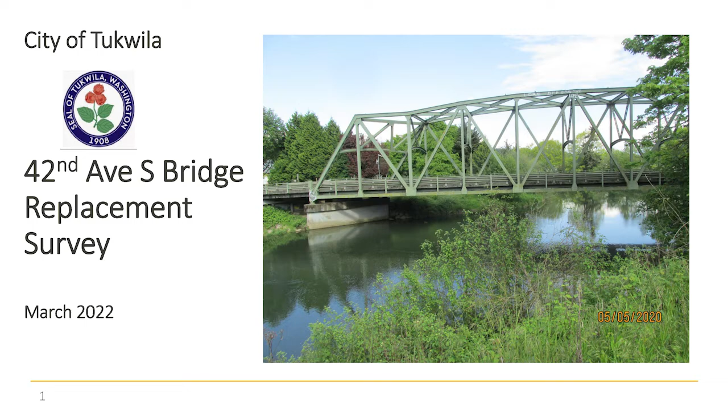As part of the design phase, a type, size, and location report was completed by design consultant Trantech Engineers. The type, size, and location report is an industry standard for bridge replacement and construction. The report identifies 2 types of materials that are being considered for the bridge replacement, which are steel or concrete, as well as 2 alignment locations along 42nd Avenue South or South 124th Street.

The report also includes the bridge size, which focuses on width and span length of the bridge, vehicle travel lanes, and sidewalks. The width of the bridge will be the same regardless of its location or material type, but the span will differ based on the location, with the 42nd Avenue Bridge location option having a main span of 255 feet and the 124th Street location option having a main span of 220 feet, since it's a straight shot across the river.

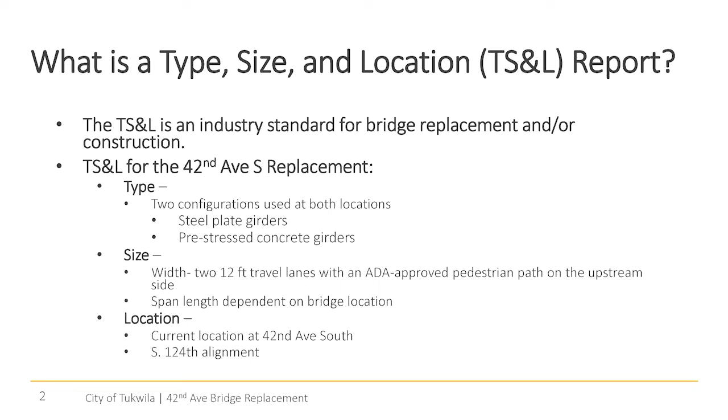The type, size, and location report gives us 4 total options for the bridge replacement. 1. 42nd Avenue South with steel plate girders. 2. 42nd Avenue South with concrete girders. 3. South 124th Street with steel plate girders. And 4. South 124th Street with concrete girders.

This table provides a cost comparison. Of the options, the most expensive option is the 42nd Avenue South alignment with a concrete girder, and the least expensive option is the South 124th Street alignment with a steel plate girder. For both options, steel was the optimal material.

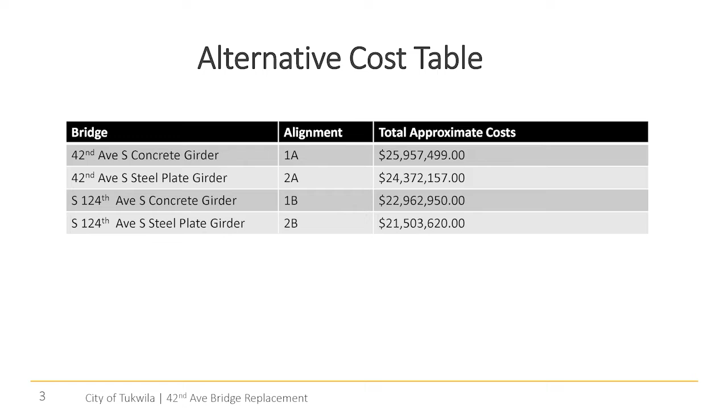This survey will focus specifically on community input regarding the location of the bridge replacement on either 42nd Avenue South or South 124th Street. The first option is to replace the bridge in its existing location along 42nd Avenue South, which connects at Interurban Avenue South. The second option is to replace the bridge along 124th Street, which also connects from Interurban Avenue. Both options are within the same corridor and will share the 42nd Avenue South and 124th Street intersection.

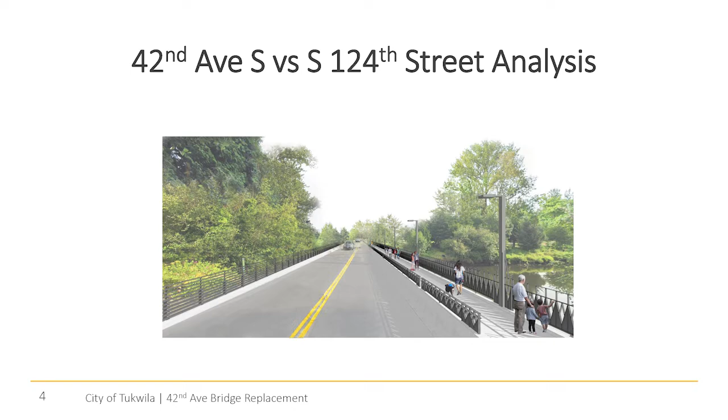This is a schematic of how the bridge will look. The bridge replacement, regardless of location or material, will be 42.5 feet wide, which will include a 10-foot sidewalk, 2 12-foot travel lanes for vehicles, and a 2-foot buffer and barrier between the travel lanes and sidewalk. Both options will have a minimum 3-foot clearance above the 100-year flood level. Since the 124th Street options would be at a higher elevation, it could potentially clear a 500-year flood level.

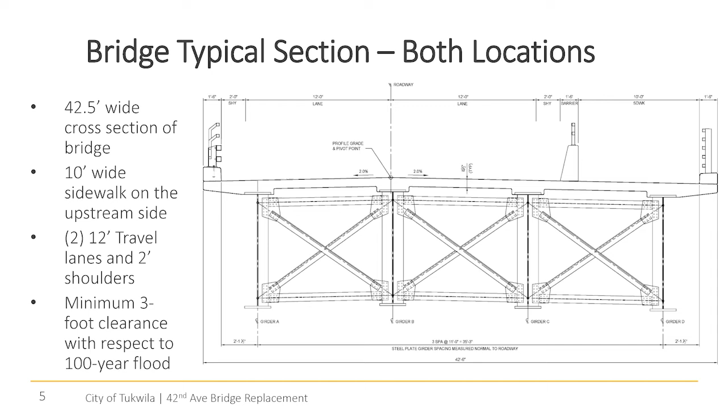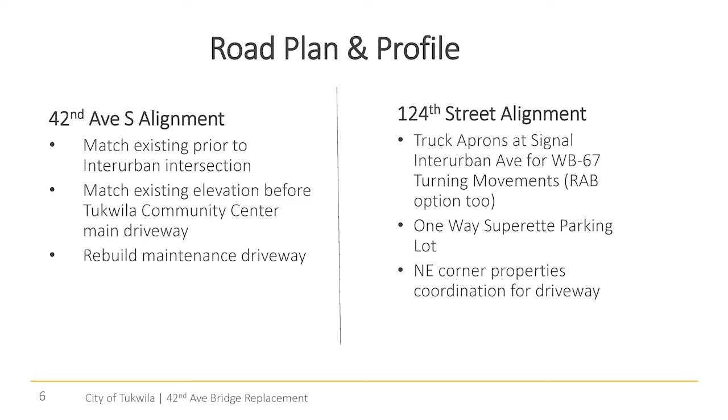This is the roadway plan and profile. For the 42nd Avenue South alignment, the maximum slope for overcrossing the river is 4.75%. It matches the grade of the driveway just before the Tukwila Community Center, as well as the grade before the intersection at Interurban. For the 124th Street option, the maximum slope would be slightly higher to match the grade of the Allentown side to Interurban Avenue South. The grade would be under 8% and meet ADA standards. The parking lot for the Superette would change to a one-way in and out lot, and coordination of driveways in the northeast corner would be required.

For the 42nd Avenue South replacement location, we will need a temporary bypass on the upstream side of the Duwamish River during construction, which may be in the form of a temporary bridge structure or by pushing the existing truss to the east. For the 124th Street option, the existing 42nd Avenue South Bridge can be used as the detour route.

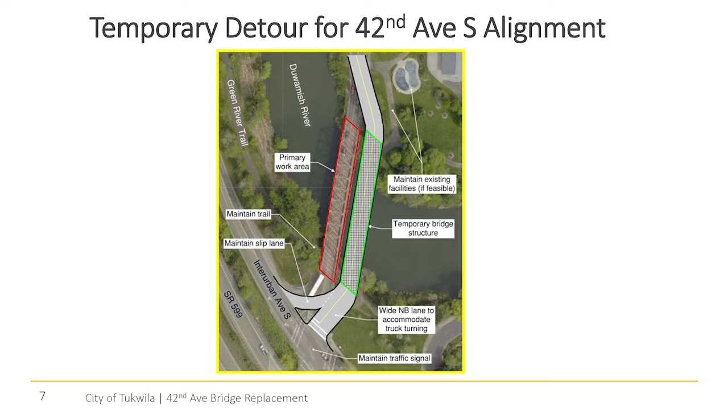Both bridge options will also provide a 10-foot clearance above the Green River Trail. The sidewalks on the new bridge will connect directly to the trail via a 14-foot wide path. The path will be a straight connection to the 42nd Avenue South alignment, and either a straight connection or a switchback for the 124th Street option. The connection grade will vary based on type of connection, but will be designed to meet ADA standards.